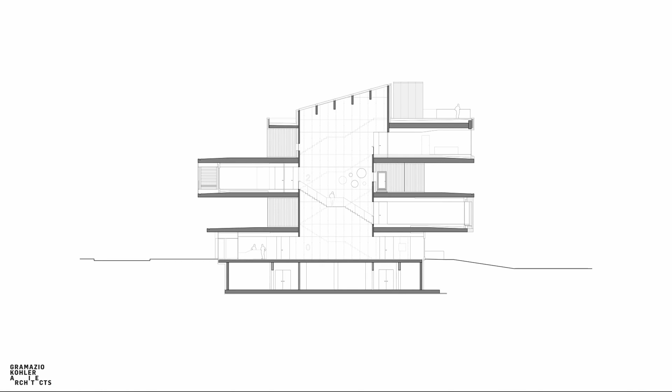I would like to switch to our research, which we conduct at ETH Zurich. There in 2005, we started with the Professorship for Architecture and Digital Fabrication, together with Fabio Gramazio. And this was our first installment. We brought a robot to ETH Zurich. Now you might think, what are these architects up to? But why did we do this?

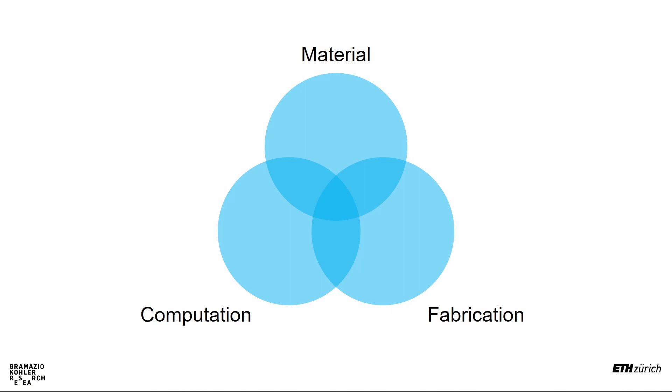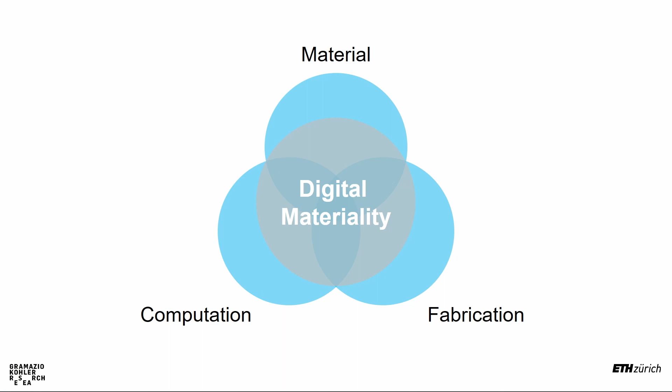We were interested in the combination of the material practice of architecture together with the computational practices or possibilities that we have nowadays. Now, you can only do this by linking this up through fabrication. And what you actually see is, if you link the material and the digital by fabrication, that you end up with a new materiality of architecture. We call this the digital materiality. It means that the material as we know it becomes informed. It changes. The digital processes are as present as the physical material processes of creating that material.

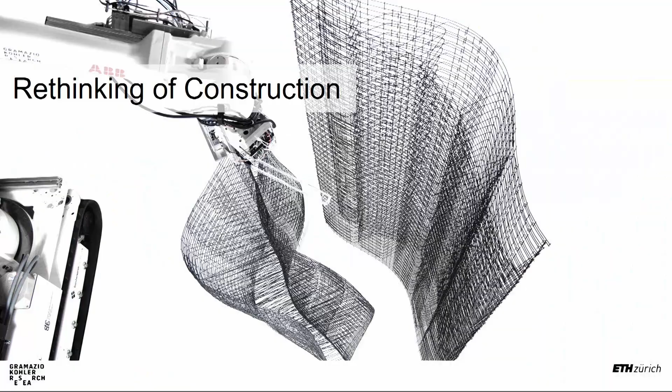It leads us to a rethinking of construction. We will build differently with digital materiality than we build today with the conventional craftsmanship. It leads us, and this links back to the Nest building that I've shown you before, to the design of processes rather than the design of forms. And surprisingly, maybe, if you use a lot of digital technologies, actually it increases and opens other possibilities for a material sensuality and presence in architecture, something which we might have lost over the decades of industrialization.

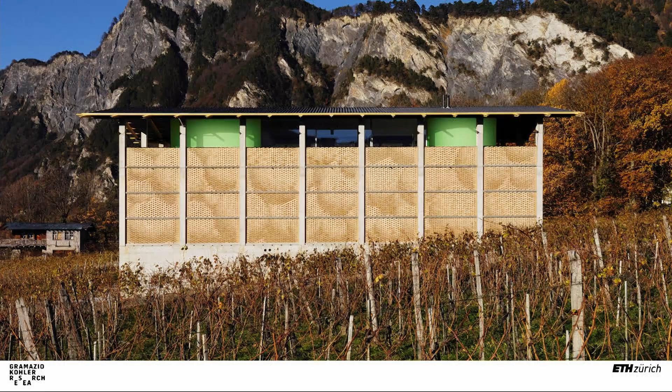I show you some examples, mainly from transfer from research to research demonstrators, to exemplify this quality through built work. And making this transfer is also one of our methods to actually develop what we call a digital building culture, to exemplify research and put it out there in the built environment and to have discussions about it.

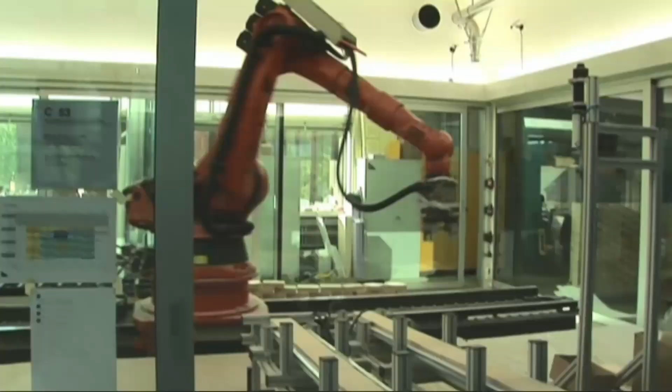This building, designed by Bearth and Deplazes as architects, and the facade designed by us for it, is the Gantenbein winery. And the facade that you see here is composed of bricks. And these bricks are robotically aggregated. Here you see the process. You see the robot gently places some glue on each brick, and he puts that glue exactly at the interface to the lower bricks, and each of the bricks can be slightly rotated. It's only up to 17 degrees in one or the other direction.

But this slight rotation in the sunlight is enough to give you this impression that you saw before of these oversized grapes of this winery. And if you go closer, what is nice, this overall, let's say, iconic expression dissolves in favor of the presence of the brick, the material that this facade is made out of. Here I give you an impression from the inside.

And this building, built in 2006, might be the first Swiss instance of what we refer to as a digital building culture. Then, at ETH Zurich, we had the possibility to make a step further, to actually go beyond something which you could still say is ornamental in its quality, but not very performative.

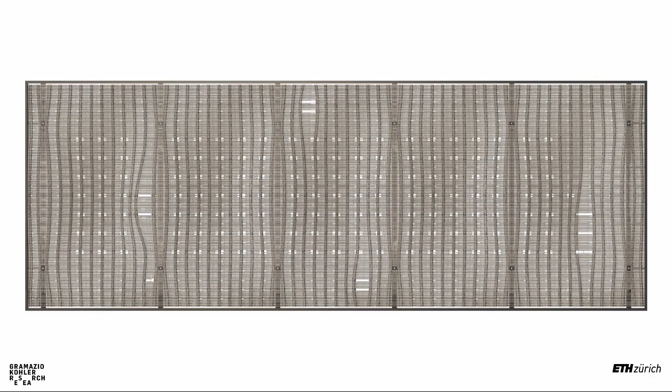Here you see an image of this roof that's composed of 50,000 different slats, which are arranged in certain manners. I cannot go into detail with respect to time, but I would like to show you this plan. Not because we design in plans, actually we don't design in plans anymore, we design through programming. But what you see here is the qualities that this digital brings into planning.

You see this softness, these gradual changes, this adaptivity. You see how at some places, like a textile, this fabric tears a bit apart. At other parts it compresses. So you see that it has a certain behavior, and that's again this design of processes.

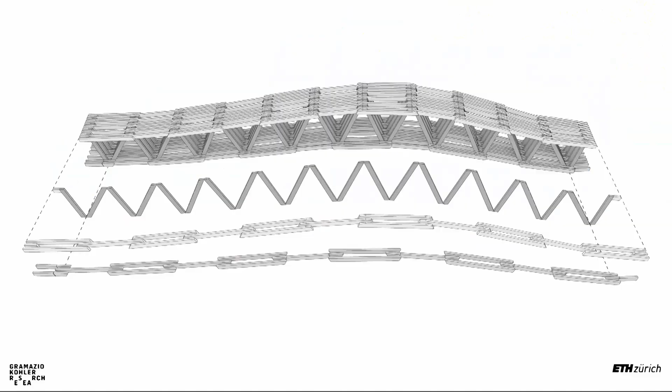This behavior is then very pragmatic. It's densifying where it meets columns. It's stretching apart where air ducts need to go through the roof, etc. It adapts to multiple requirements, including lighting, water, etc. This is the build-up of the roof. So it's, as I said, composed of these 50,000 slats, and this is how it is made.

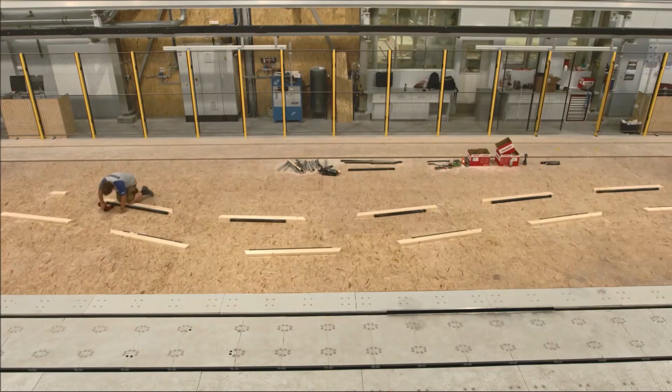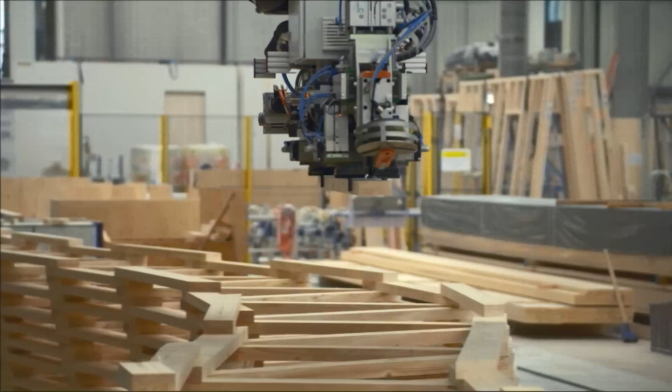You see, at an industrial partner, we managed to convince him to build a machine to build this roof, and now he can do other projects with these digital technologies. Basically, you see a layout of layer by layer slats, and the machine that gently cuts these slats, puts them on top of one another, executes a nailing pattern, and this is structurally informed.

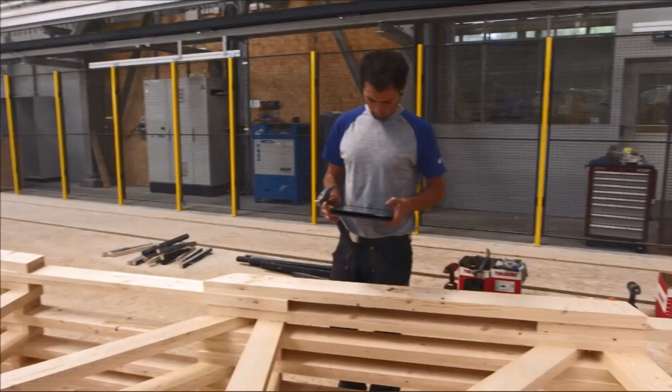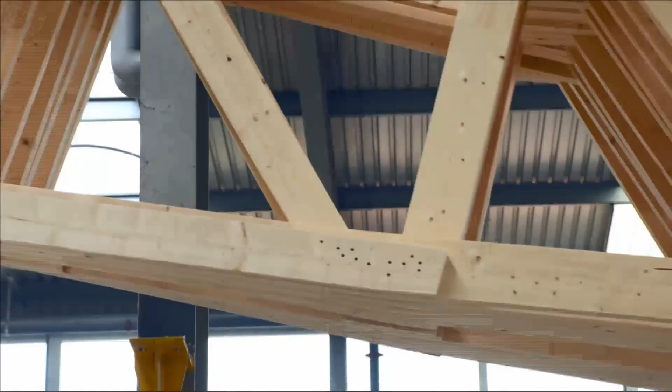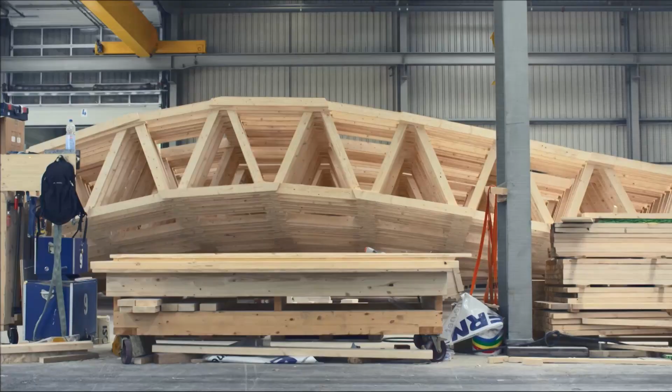So this could only be calculated on a computer and cannot actually be done by hand. So you literally need to try many nailing patterns to understand which one actually works and transfers the forces. And then you have building products such as these. So that's a 13-meter long beam that is basically 3D printed, but instead of powder and binder, it's timber slats and nails which hold it together, and it's stocked here to then be placed as a functioning building element of our institute.

And I welcome you to come by anytime. That's where we now work. These are the working places of the PhD students at the institute. So we gradually start making the digital integrative reality of an architectural design process, but also a constructive process from the bottom up. And the last of these demonstrators, which we realized, is called the DFAB House.

The DFAB House has been realized in partnership of ETH Zurich, the EMPA, and the National Center of Competence in Research in Digital Fabrication, which I had the pleasure to initiate. And it's actually done by a number of disciplines. So this is not architects alone toying around with robots and machines. This is really starting to get an interdisciplinary collaboration where different aspects of technology and architecture meet as a contemporary approach to architecture.

It involves many people. So in this case, close to 50 researchers, technicians, and others that have contributed not only to the concept and execution of this, but also to the design of this. So this little building, which I'm going to show you here, doesn't have one architect. It has a multitude of architects, by definition.

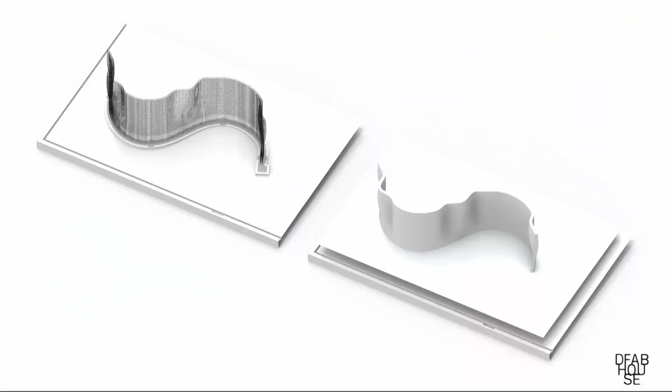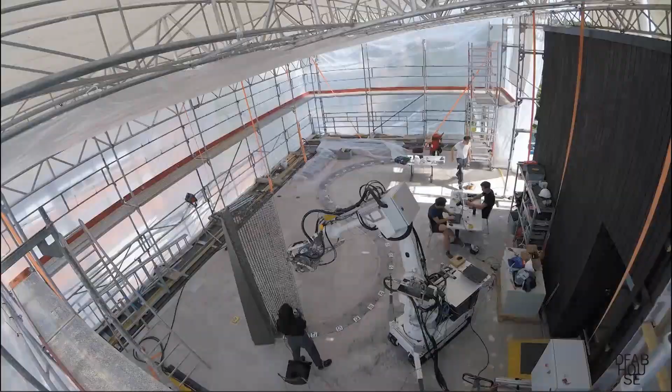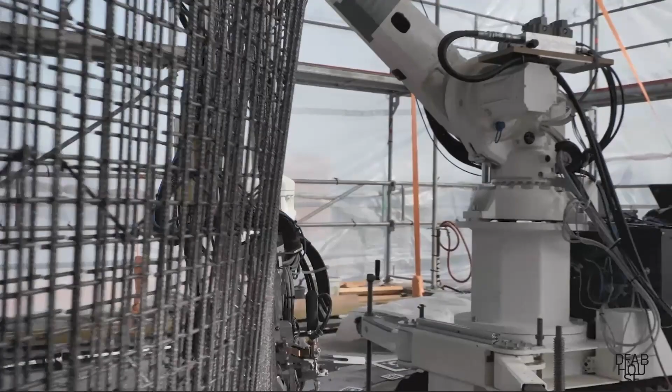So let me start with the first one. This is Mesh Mold. This is a formwork-free concrete building technique. Basically a robot, well, I'll show you in the video, a robot builds a mesh. This is our PhD student, Katrin. It builds a mesh, and this mesh is very fine-grained. This mesh can then hold concrete. So you see the robot builds this form. It doesn't need any plan. It's a human-machine collaboration. It's usually 2 humans, 1 robot. That's roughly our ratio. So there will be new jobs, to answer this beforehand.

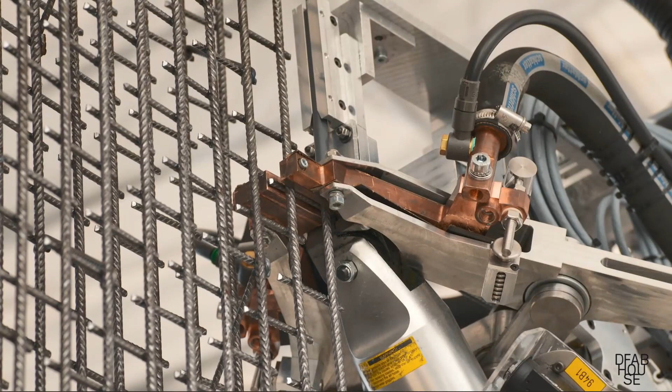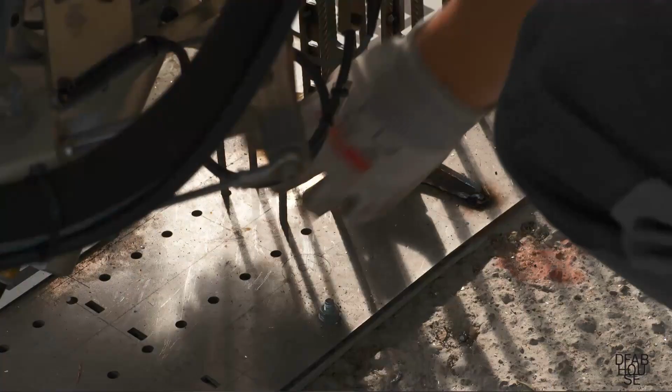And here you see this building process where the robot not only produces this mesh on site, but also gives it form. And this form, of course, can be informed by multiple criteria, in particular structural ones in this case, but also architectural ones, as this wall is the only wall that is supporting the upper floors, but it's also actually dividing the space of the ground floor of this living unit.

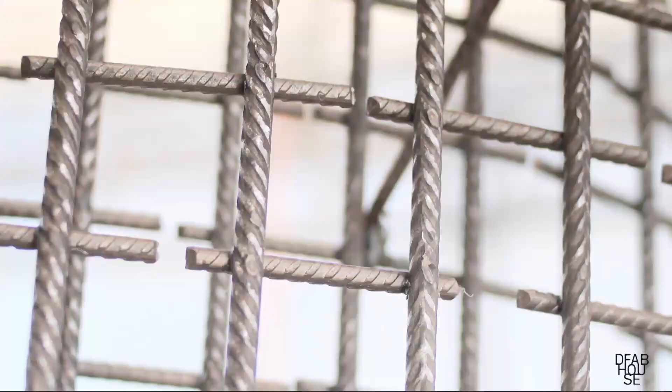Let me jump a bit ahead. No, I can't do that.

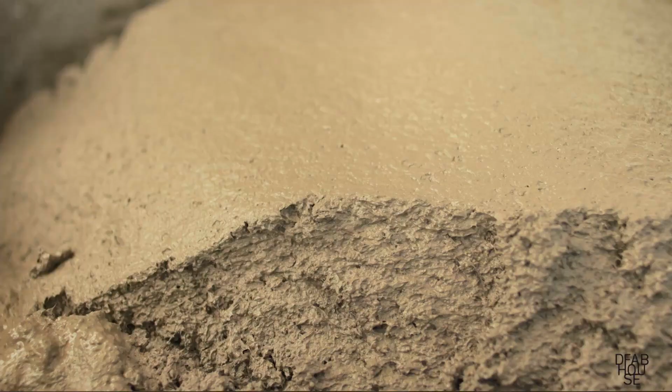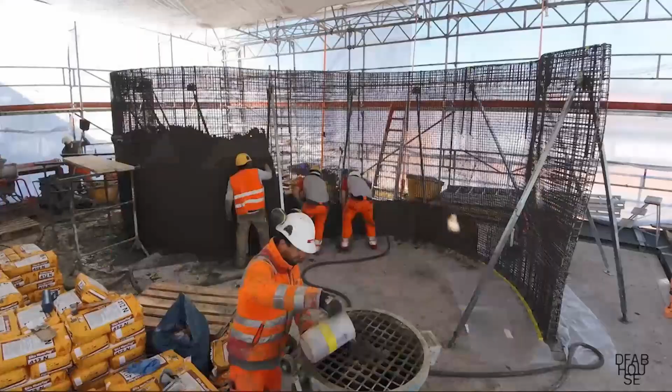Good. Here you see the filling. So this is again a human-machine collaboration. The mesh is built with this digital procedure. The filling is done manually because we figured out this can easily and actually better be done by humans. And you see how this mesh is now filled, and that you don't need any formwork to sustain the pressure of the liquid concrete. That is the real innovation, and that's actually the contribution to sustainability that this project makes.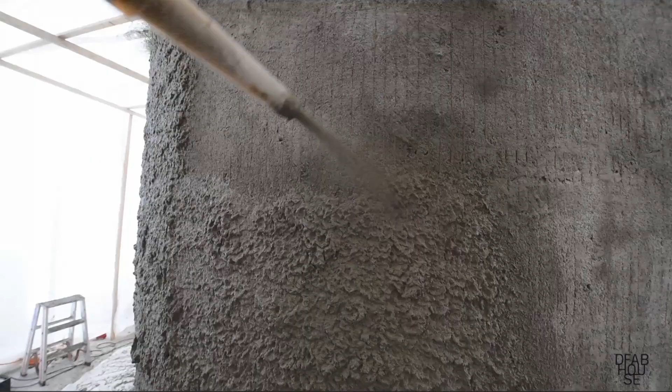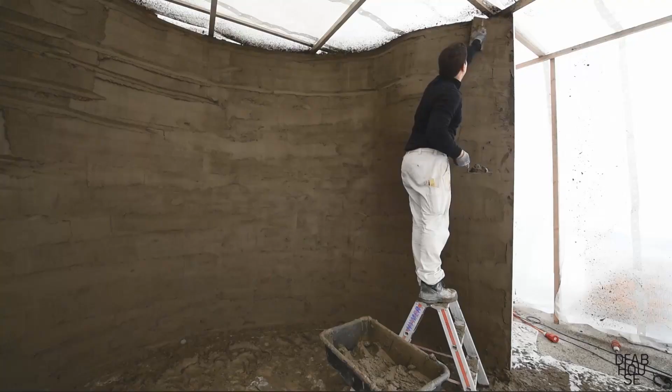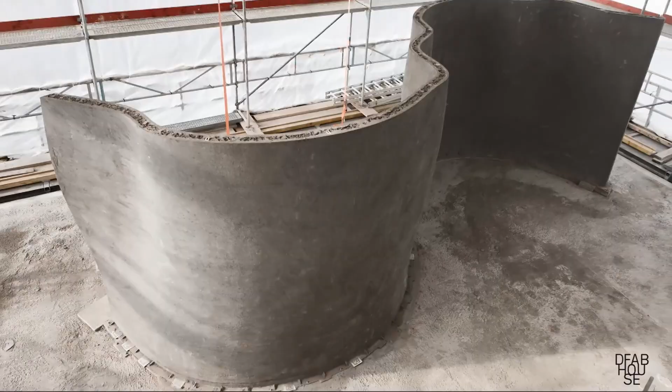Then final layers are added, and the finishing touch in this case is also done by human craftsmen. And so here we talk about not building the building twice, once as formwork and then second concreting it, but actually just doing it once straight away. So this is this process. These are our happy researchers to share this also with you.

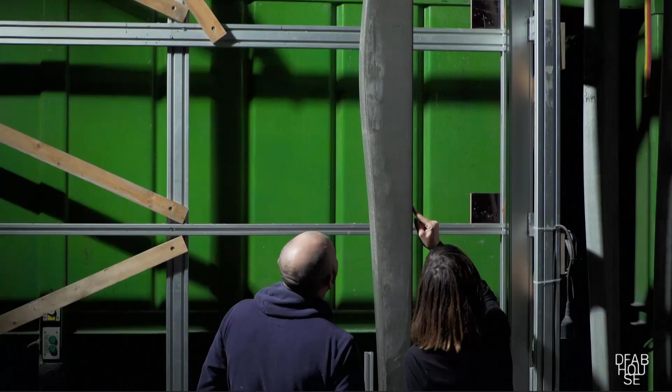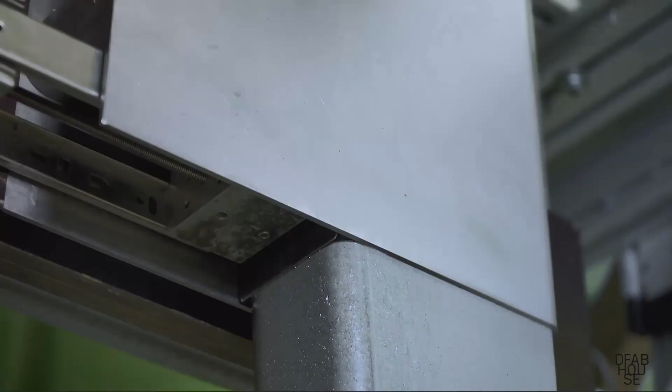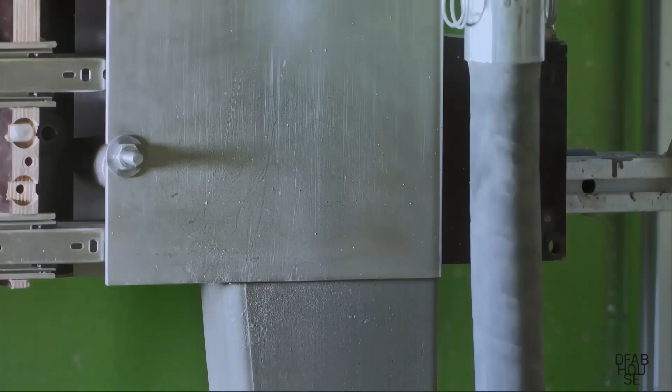Another concreting process is Smart Dynamic Casting. We employed this for the facade mullions. This is a process where only a minimal formwork is being used. You see this formwork slips up and releases concrete just underneath. And this concrete is just at the right moment where it's about to harden, but it's not too hard so that it can still be shaped. So it can be brought into a differentiated form at that moment.

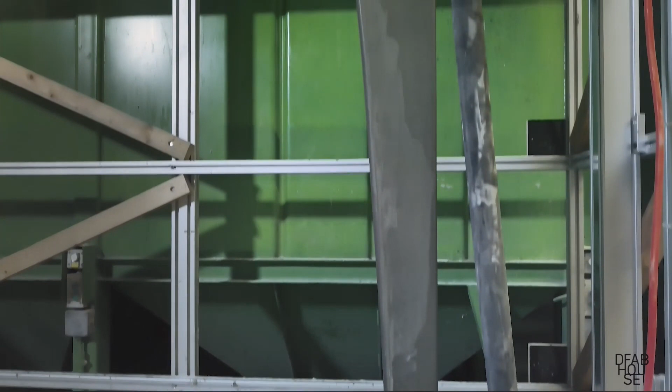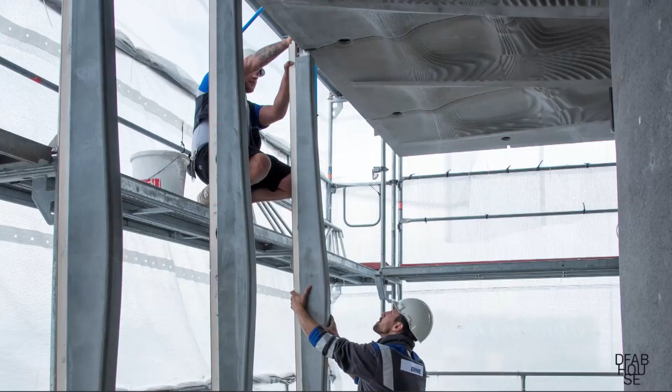And here the digital does something else. It allows us a level of control to work adaptively with material that was not possible before the digital. So again, our approach to the material reality of architecture and the processes on how architecture is built changes. And then these columns are produced, or facade mullions, so they're not load-bearing, and inserted.

And then we have a third concreting technique, that's the so-called Smart Slab. Here the formwork technology changes. This is the slab. It's like a table cantilevering off the Mesh Mold wall. And this table now reacts to the wall geometry. So whenever you would change the wall geometry in the design, actually the table would change its form. And it would do that through a computational design process. So despite that these were different research groups designing these entities, if some group were to change something, the next group's project would automatically adapt.

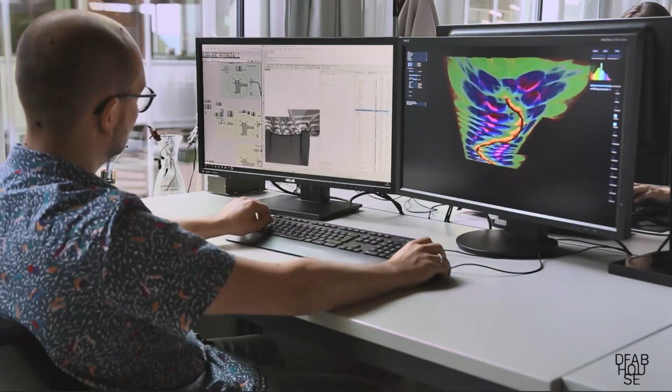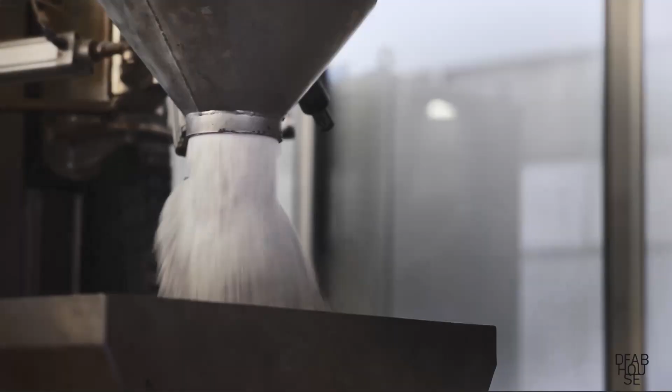That's a radical shift for those of you that do architecture in the way that we currently plan. So this is how it is looking. This project has been done by the research group of Professor Benjamin Dillenburger. You see the group studying the project, these two different building components coming together in rendering, actually the three different concreting components. And here is how the project is built.

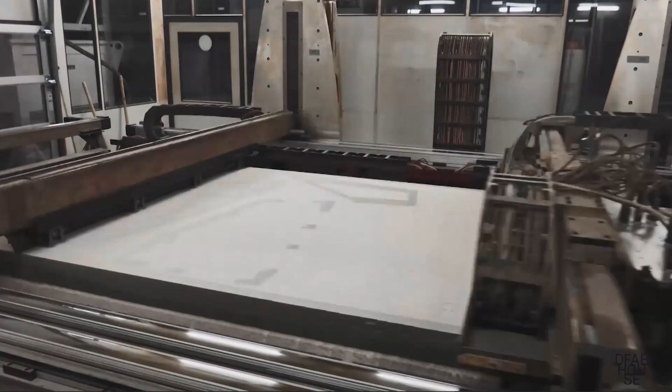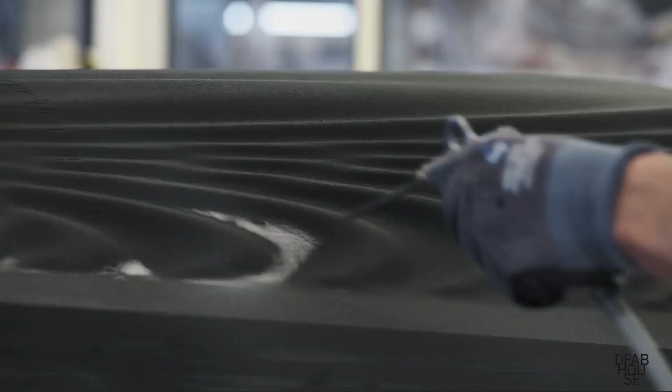This is built with a formwork that uses 3D printing. So you see here a 3D printer printing up formwork elements. Then these are being unearthed. I don't know the right word, how you say that in English. So basically cleared off their printing bed. And afterwards, these pieces are assembled to the full formwork size, which you see here.

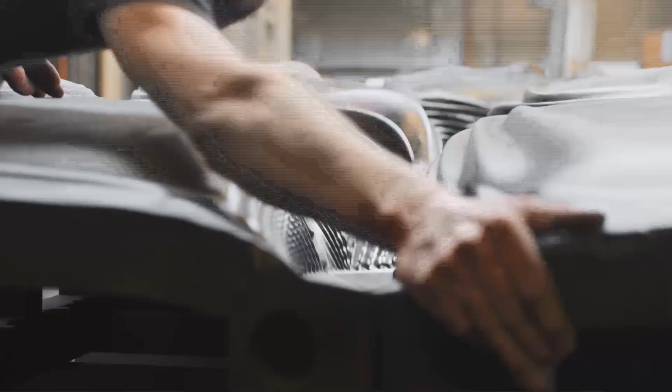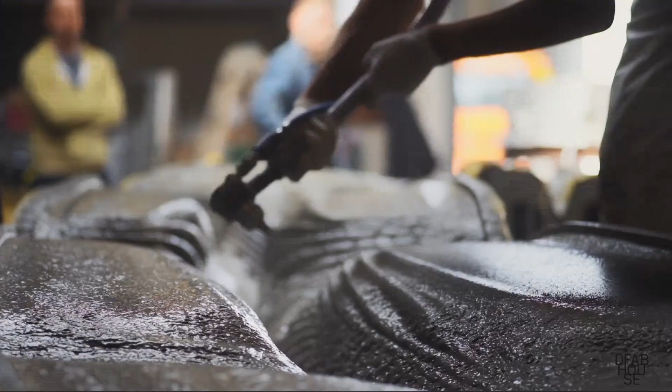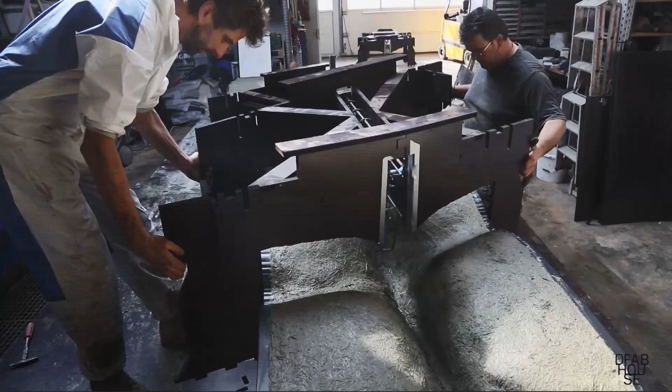And you can already see the high degrees of details, the level of expressivity that is part of these wonderful 3D printed formworks. And so that is then concreted with a very thin shell. This is only about 2 centimeters, if I recall correctly, of a first concreting shell. And then later, there is another part of formwork put into place on which rib elements are cast.

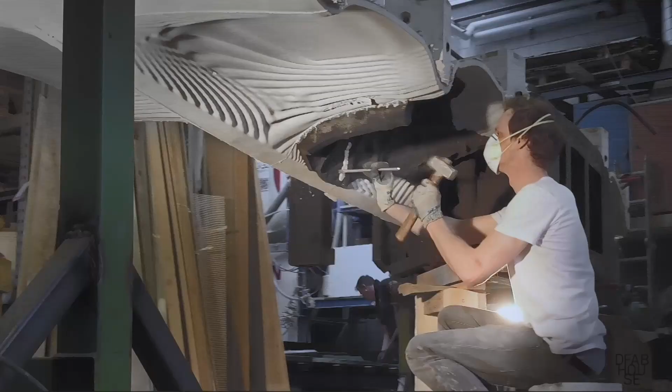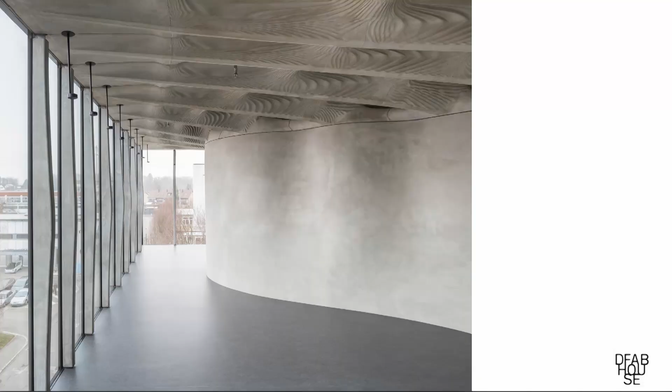So again, the try here is to see what aesthetically can be done with these technologies, how it factually works, but also to improve the efficiency and potentially the ecology of building with concrete. So if you can start to integrate many aspects in a concrete element, if you can give it specific forms that are optimized in material terms, you of course have a big environmental advantage. Good. Here are the expressions on the concrete side. You see how the architecture of working with concrete changes by changing the practices towards digital fabrication practices.

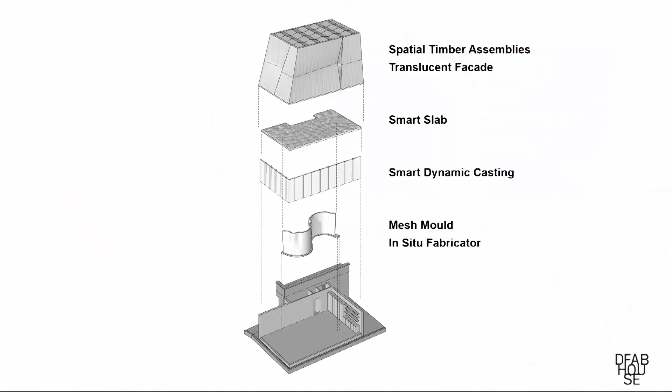Now I got the 1 minute note, so I'm gonna skip through this. So you can do the same thing with timber by building spatially with timber, directly with using robotic arms. If you build spatially with timber, you actually get stiff structures which are reminiscent of old timber houses, which then call for other facades because you don't need any stiffening facades. In this case, we developed a membrane system which can be filled with aerogel that is only 9 to 12 centimeters thick.

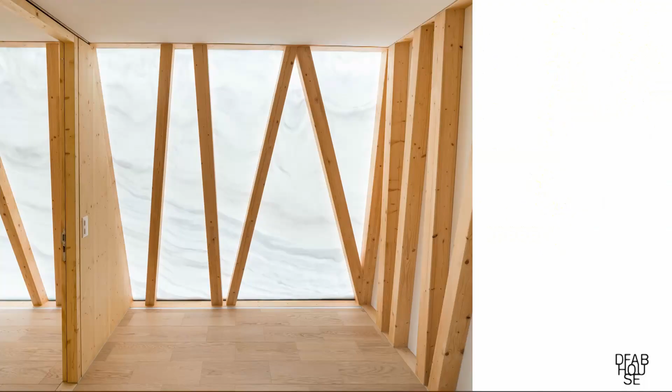And then the material expression of filling that results again in this very beautiful expression of the material itself, this marble-like quality. And here you see some impressions from the inside. DFAB House can also be visited, so I encourage you to do that.

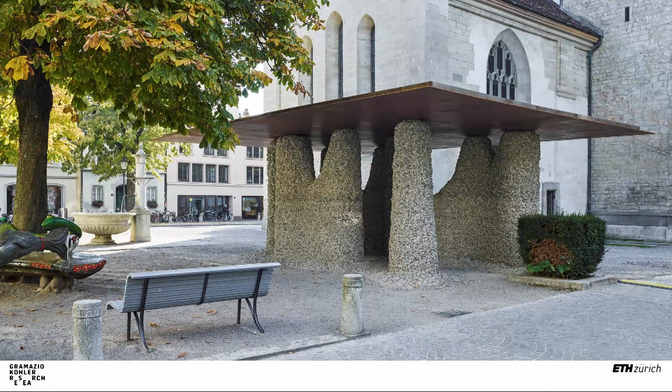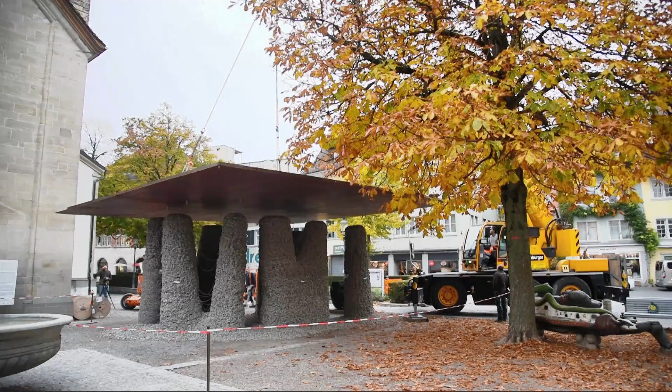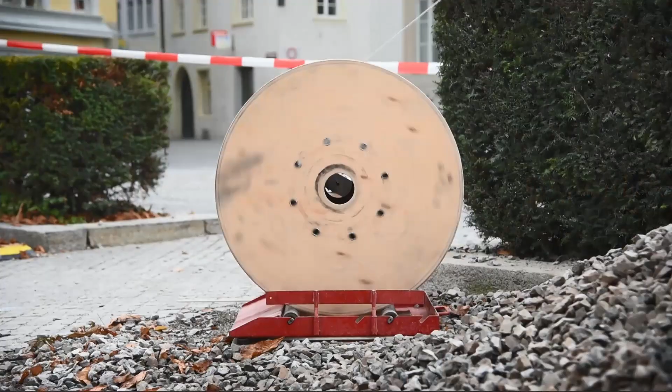Now, to sum up, I would like to show you a last project, and actually not the building of it, but the building back. I was telling before that I think to go towards this digital and material practice is important for ecological reasons. And this pavilion here that you see is built only by gravel and strings with a roof on top. So what you see here is just loose gravel and strings. And I would like to show you how this pavilion was built back, because this pavilion, once you take the roof off, is fully reversible. That means its materials can fully be reused and are in the same quality as before.

What you do, simply you pull out the string again that was used by the robot to build up this amalgam of string and gravel to build this structure. So basically you reverse the process, the construction process, and you end up with a pile of gravel and the spools of string.

Good. So a digital building culture, to the current moment, I would say it's an active, maybe proactive architectural design culture that is inclusive of digital and physical processes and the resources thereof. And how to promote such a digital building culture? I think we should strengthen contemporary architectural research. We should create interdisciplinary research centers, ensure digital literacy in education of architecture, engineering, and construction. We should introduce creative programming and architecture, as was mentioned before, in primary schools.

We should support architectural open source coding communities. It's not really existing yet, but starting to emerge. We should foster computational architecture studios. It exists in little numbers, but it exists. And we should invest in innovative flagship projects.